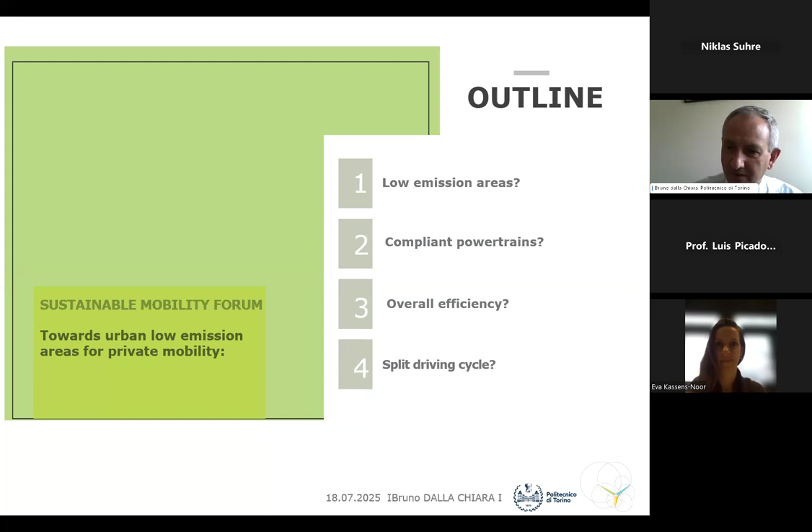As you remember, we already defined what a sustainable system is, a sustainable transport system. And the urban context, as you can see at the end of this slide, is important because there we have 3 citizens out of 4 living in Europe in this context. So 3 out of 4 people in Europe live in cities. This means that in the cities...

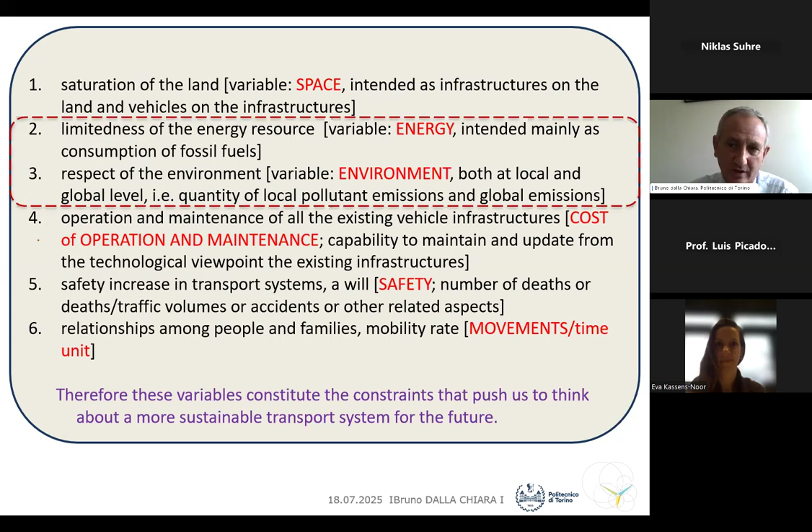European citizens express mainly their daily mobility there, especially for 4, 5, 6 days per week. Sometimes they go away during the weekend or travel for work, but there they express their daily mobility. Sorry if I underline this well-known thing, but it's important because when we discuss which could be the compliant powertrains, this is relevant. And then, as you may remember, these are the variables that influence sustainability. It could be an interpretation, of course, but I will concentrate on two of them: energy and environment.

Let's start with this slide, which represents, based on data published in February this year, the concentration of PM2.5. It's not the only element contributing to local pollution—we also have NOx and PM10—but I took this one because in the area where I live, in the north of Italy, we have one of the most extended areas where the concentration of particulate matter 2.5 is highest, as you can see here. But there are also areas in Europe with a certain concentration, and this is just one of the components of local pollution.

What I underline is that in Europe we are trying to solve these concentrations as far as possible. This is related to Directive 2881 of 2024, which I already mentioned in a previous seminar and will recall shortly. The message I'm providing is that there are areas in Europe where the concentration of particulate matter or other local pollutants is more or less high, and we try to solve them.

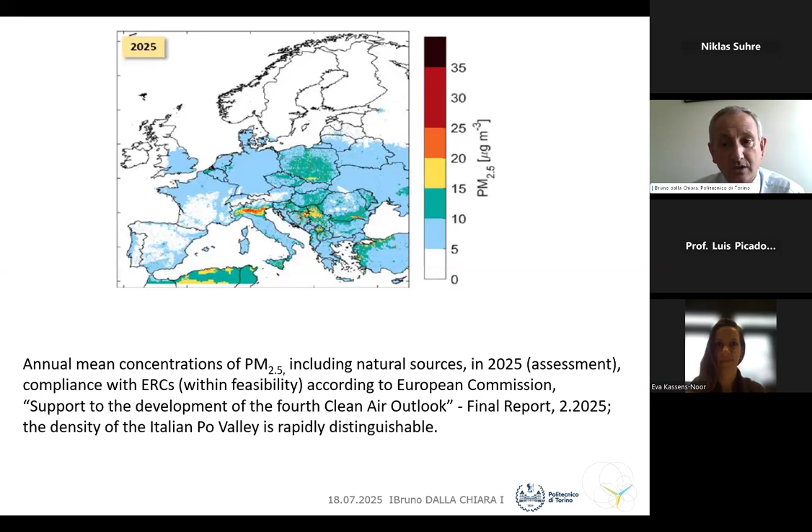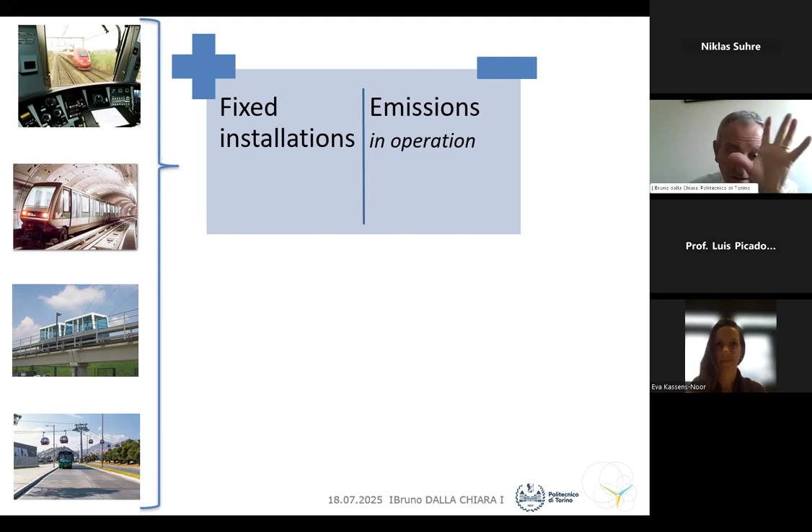Then, as you may remember, more fixed installations in the urban context mean less emissions in operations. This is obvious, because typically we can rely on electrified lines. So we differentiate at the well-to-tank side the energy sources, and locally we typically use an electric motor. This is positive because we also concentrate the masses that have to be transported—addressing trains, metros, automated people movers, and cableways. But I will not speak about them; they almost all rely on electric traction and electric motors on board.

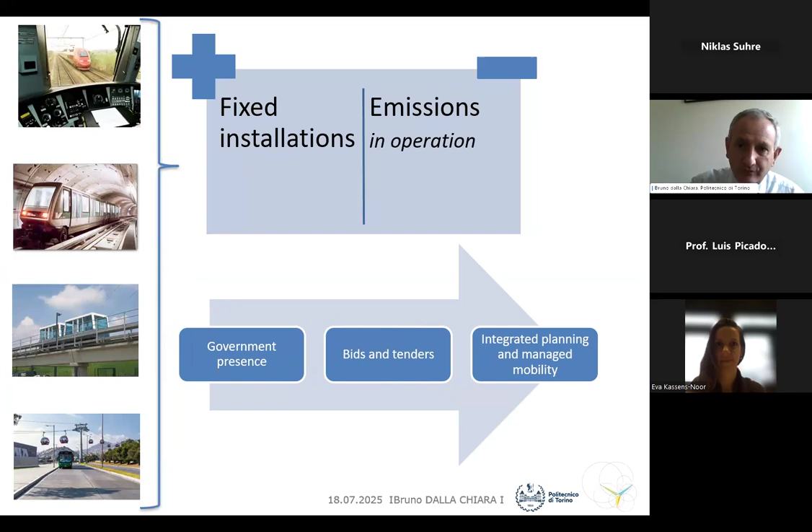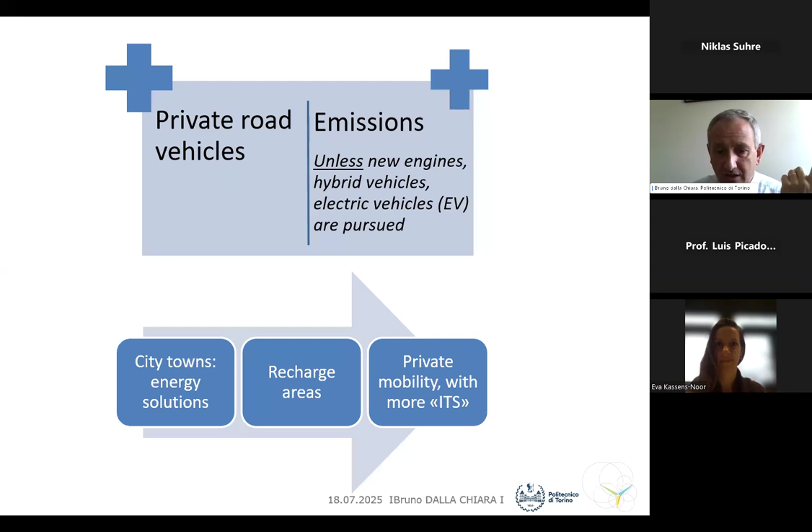We will concentrate on the distributed flows related to private mobility. As far as we have government presence, bids, tenders, and integrated planning, we can rely more on fixed installations, less typically on private mobility. So more private vehicles generally means more emissions, unless we address new engines, hybrid powertrains, electric vehicles—and we need to understand today which could be the most suitable ones.

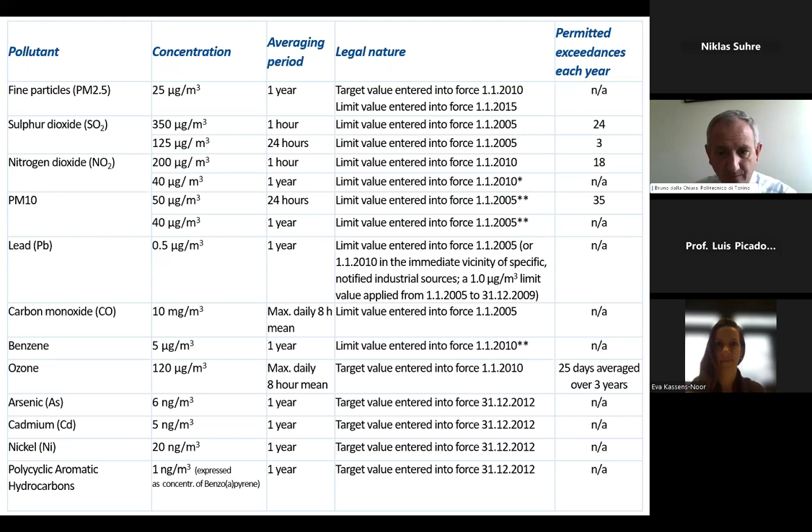I recall again the passage from Directive 50/2008 regarding the concentration of local pollutants, to which we associate this slide: the concentration, the period of reference, the permitted exceedances each year. This becomes, as I mentioned before and in a previous seminar, Directive 2024/2881.

This implies some reduced limits need to be respected, in order to guarantee normal use of the city. Otherwise, the public administration has to intervene. It's said that from next year they could even receive a fee, have to pay a certain amount of money if they don't respect that. I'm not sure about that, it regards political aspects, but it's said like that.

You will also remember, you can remember the passage, so I recall the elements concerning local pollutants. As regards global emissions, the CO2, the passage from 130 and nowadays 95 grams of CO2 per kilometer has been actuated in 2021, and the European Parliament in 2023 has declared the aim to reduce these 95 grams of CO2 to zero in 2035.

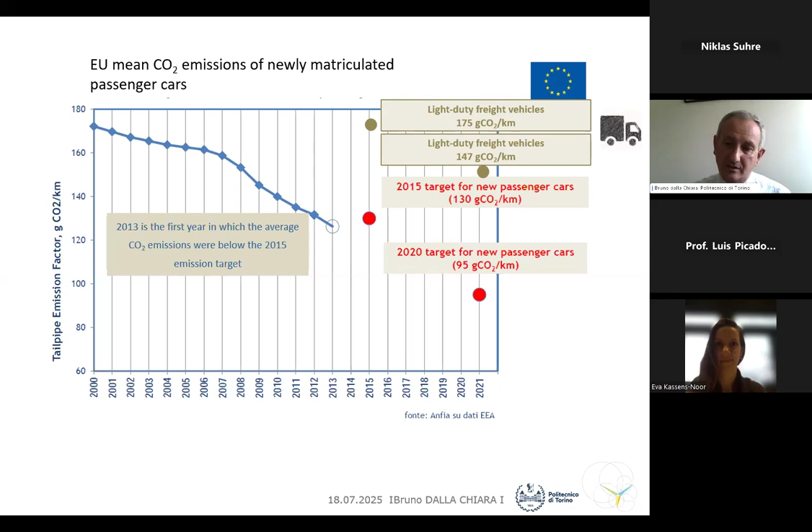This is happening in other parts of the world, as I already said, so we are not alone as Europeans, but we are alone when we want to say we want to reach zero in 2035. Zero where? Because electric vehicles have no local emissions, but they have emissions for producing the energy and storing the energy in the battery. We need to find a solution.

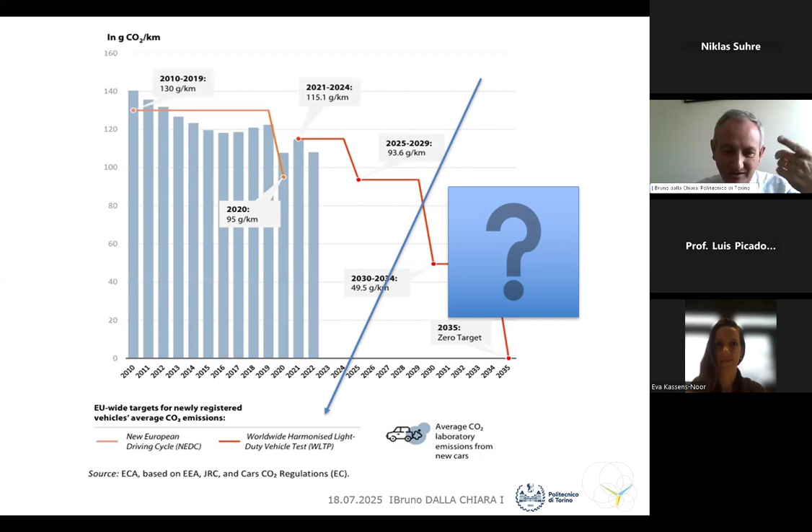How? Let's remember that we are referring to the WLTP, the worldwide harmonized light-duty vehicle test procedure, a conventional cycle harmonized in the world. Nobody actually does that, but conventionally everybody has to respect it. And as you already know, if we deal with electric vehicles, we don't have the tailpipe, so as I said before, we need to consider the energy chain.

The problem is, as I anticipated, the battery, because the battery has a low density with respect to alternative fuels that we have at disposal, and needs time. If we want to reduce this time, we need power. And if we want high power, we need to pay, and we need the electric grid suitable for providing that. Last but not least, we need to guarantee that on the territory.

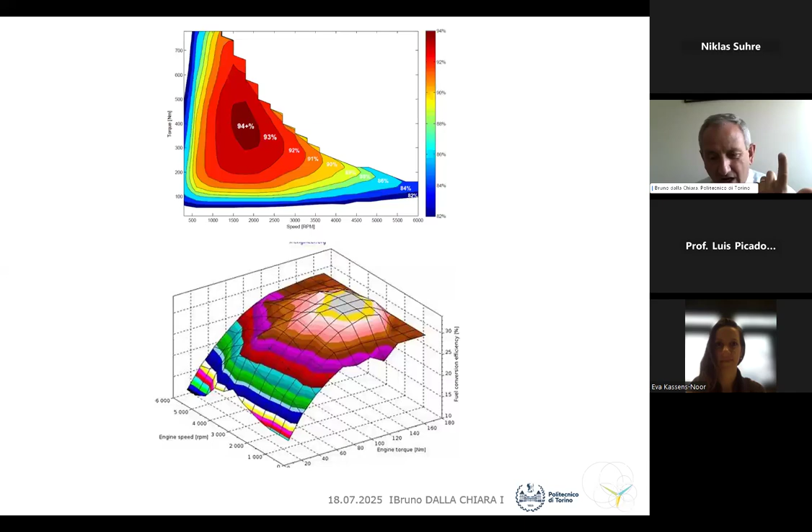Since we need to arrive where there is the electric grid, if we rely on electric power, we need to guarantee an electric grid. But on the other side, if we have a liquid fuel, we can bring the liquid fuel to the vehicle. So each of the two solutions have some positive elements and some negative ones. So in order to arrive at the best powertrains for urban mobility, we need to know the physics of the problem, and here we are.

Now I start something brand new with respect to what I said in the last two lessons, and we analyze the well-to-wheel from the efficiency point of view.

Let's suppose that we want an electric vehicle. I say, well, I don't contribute to local pollutants—PM 2.5 that I mentioned before, PM 10, NOx—I'm not contributing. So I like that. But at the same time, let's remember that we want to contain the global emissions, so CO2. To do that, we need to look at the overall energy chain.

And in this case, we rely, for example, on a thermoelectric power plant installation, which has a certain efficiency.

The most expected alternative is renewables, of course. But renewables mean having solar power, windmills, hydroelectric available for a great quantity of energy. Let's remember from my first seminar that transport systems absorb in Europe nearly one third of the overall energy production. So if we want to provide an alternative with renewables, it's a huge amount of energy that we need.

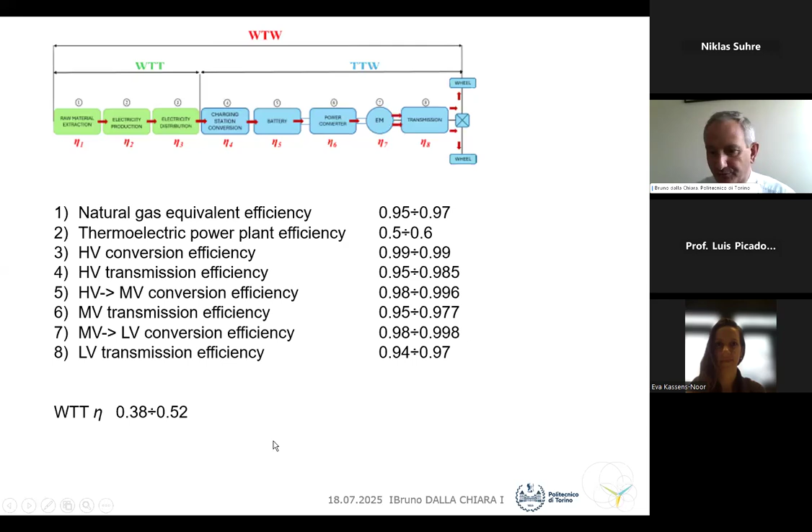Then we want to use this power for recharging electric vehicles, but the CO2 emissions have already been generated in this phase, especially in the power plant. Then let's consider the tank-to-wheel, and we are referring again to a battery electric vehicle.

We have a charger efficiency, in the charging station, that can lose some percent - minimum 3% is already too low, could be 3%, 4%, even 10-12%. Then we have the round-trip battery efficiency, which depends on the battery itself. I cannot enter into too much detail, but we lose 10-15%. Then if we have the aging effect, this loss of efficiency while charging the battery can increase.

Then we have the inverter efficiency on board, 0.95 more or less, and the efficiency of the electric motor that corresponds to the map I mentioned before - it depends how it works, 0.85, 0.90, 0.92, something like that. And then we have the transmission efficiency on board.

We lose some points there. I've not inserted this because it's very variable depending on climate conditions, on the conditions on board that the driver wants, and the BMS - the battery management thermal system - which implies, as we will see shortly, a certain variation in the overall efficiency.

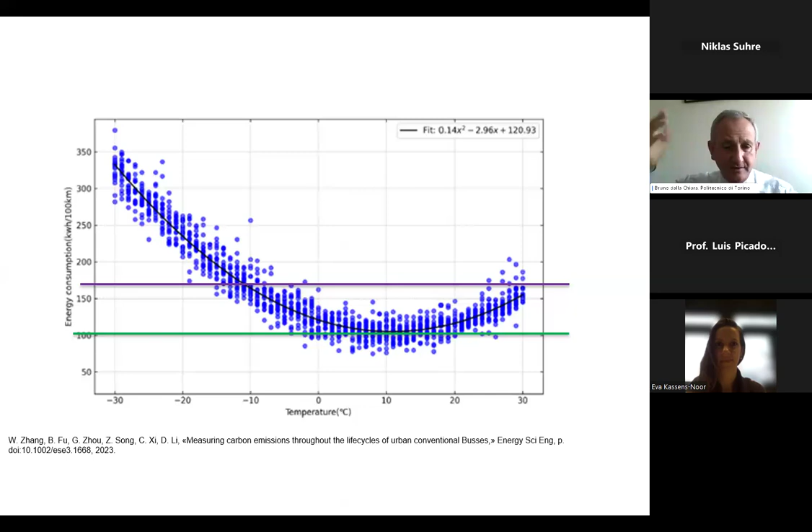But if we look at CO2 and at the well-to-wheel, just taking as input data the efficiencies which provoke a certain consumption or loss of energy, then we understand that it's difficult for the electric vehicle to be winning in energy in any condition, from the energy point of view, without considering the thermal effect. An internal combustion engine has an efficiency, as we have seen, starting from 48%, but in the city it can be reduced below 20%.

So in that case, the overall energy chain is in favor of electric traction. While if the internal combustion engine can work well—meaning not frequent acceleration and deceleration phases, not traffic jams, not searching for parking, not traffic lights—then the overall energy chain is in favor of the internal combustion engine. You can have that condition also in serial hybrid powertrains, because the internal combustion engine operates in the highest part of the map. We will see that shortly.

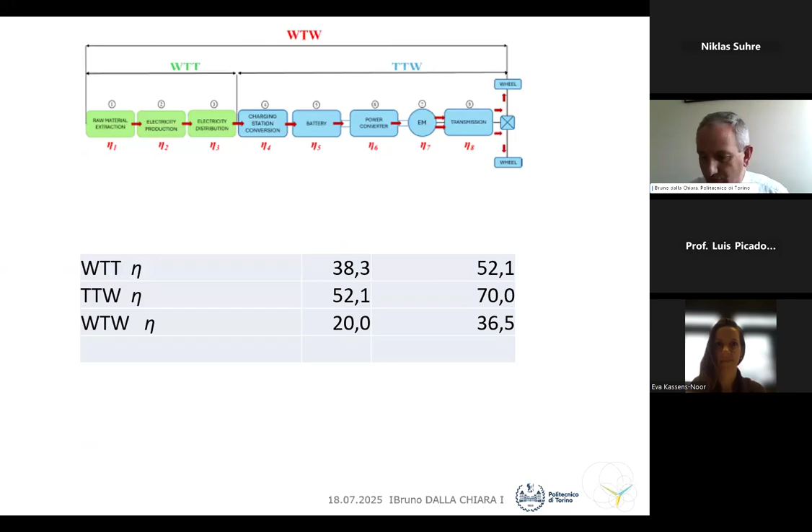So once we understand the overall efficiency, we can calculate it for each case. I just gave you a very wide example, but you can calculate it for each condition. We need to consider the usage that users of automobiles make of their vehicles. Here you have a typical distribution from different sources—there is a comparison in the publication I mentioned, which is a parabola.

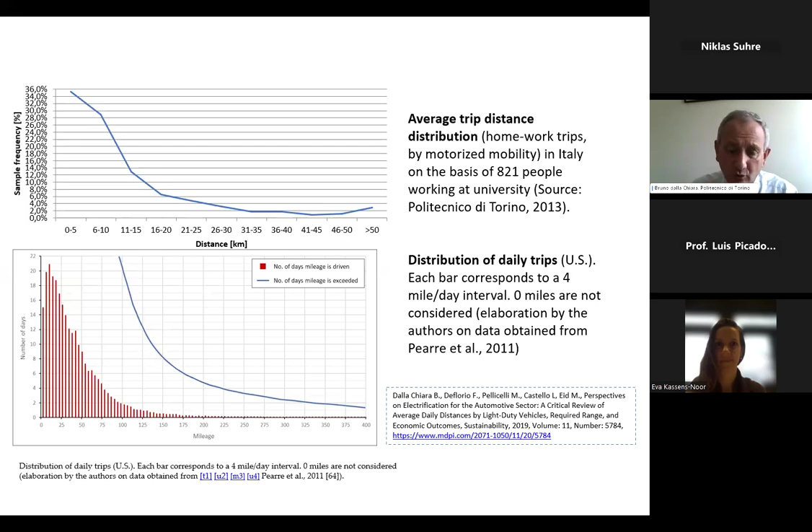As I mentioned in previous seminars, on the left part of this picture we have the lowest efficiency of the internal combustion engine, but also the most frequent and short travels of a typical European citizen. While where we have longer distances, and where it is more difficult to provide electric power, typically we have the highest efficiency of the internal combustion engine and longer travels which are less compliant with the autonomy of electric batteries.

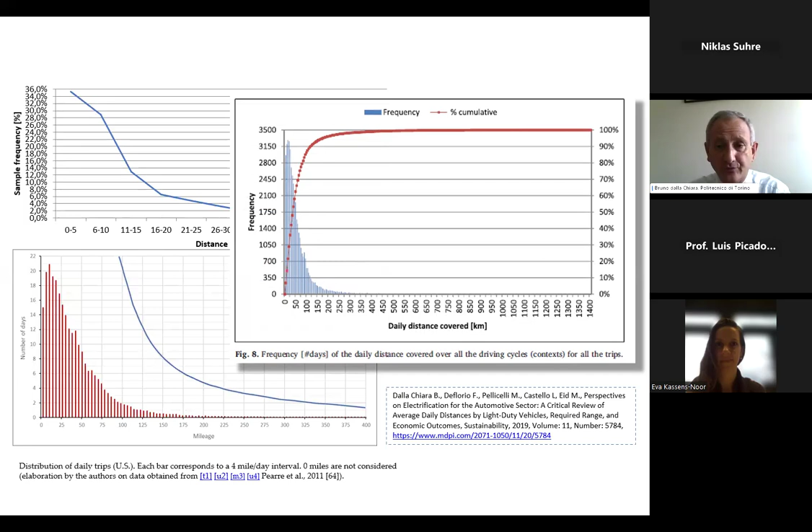So this means we have to look also at the relationship between frequency and daily distance covered, in order to couple that with the energy consumption of the vehicles and the idle time we have at disposal. But the first main message I want to leave today is that we can split urban context from extra-urban context. Where is the limit?

Geofencing. A city can decide that just the central historic part is the one to be protected from an environmental and traffic point of view—the use of space, the use of air—or it can decide that the overall surface of the city has to be protected. It's up to the administration, up to the condition.

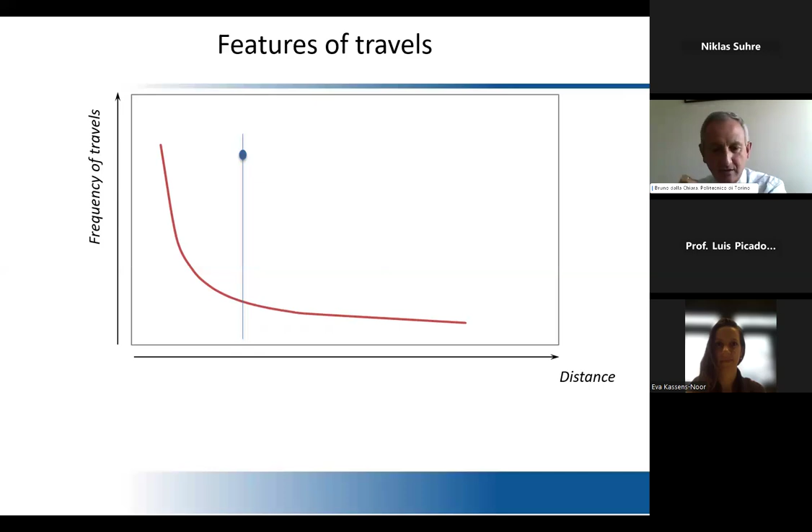You remember that picture where we had the concentration of PM 2.5? Some cities could decide that the overall city has to be considered, so it depends on the local administration. But what I'm saying is that we can split local problems from extra-local or extra-urban problems. And urban mobility, since it's frequent and with short distances, can be more compliant with the need to have electric traction.

So the decision of the European Parliament can be applied in an urban context, though from the well-to-wheel and life cycle point of view—well, from the well-to-wheel—it is not so compliant with an extra-urban context.

If we look at the life cycle, what is separated is the production. Production of a vehicle in China, for example, where we have 63% carbon, is something that has to be avoided from the point of view of CO2. From the point of view of well-to-wheel, electric traction in the city could be a good solution.

But if we look at the overall picture, what I can tell you—and this is a second important message—is that it's not good to have this clash, this competition, between the electric motor and the internal combustion engine. It's much better, and I said that in Darmstadt already, it's much better to have their collaboration.

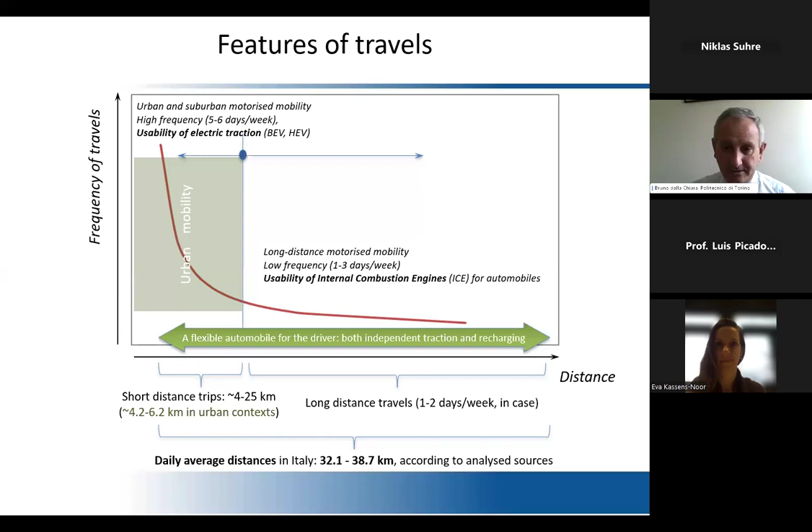Let's recall which are the alternatives, so now I can point out which can be the most relevant, suitable, and attractive ones.

Micro mild hybrids are a good bridge towards full hybrid. They are the entrance level. They already obtain something, and their benefit is much higher exactly where we need it, that is in the cities, during acceleration and deceleration phases.

But if we want to be serious, we have to look at full hybrid. In the full hybrid, we have the possibility to make the internal combustion engine work at its highest efficiency, or to put it in parallel or in series with the electric motor. These are the two alternatives: parallel or serial.

Within this context, we can have the plug-in option, to recharge the battery both from the internal combustion engine and directly from the grid. This, in the urban context, is much easier than in the countryside or on the mountains, because you cannot have a grid spread all over the territory - that would be exaggerated, to be honest. The electric grid in the urban context is something we can pursue.

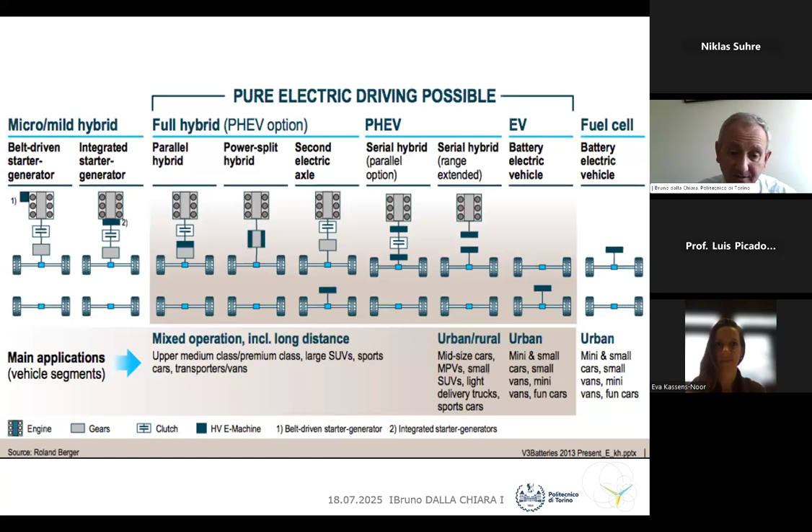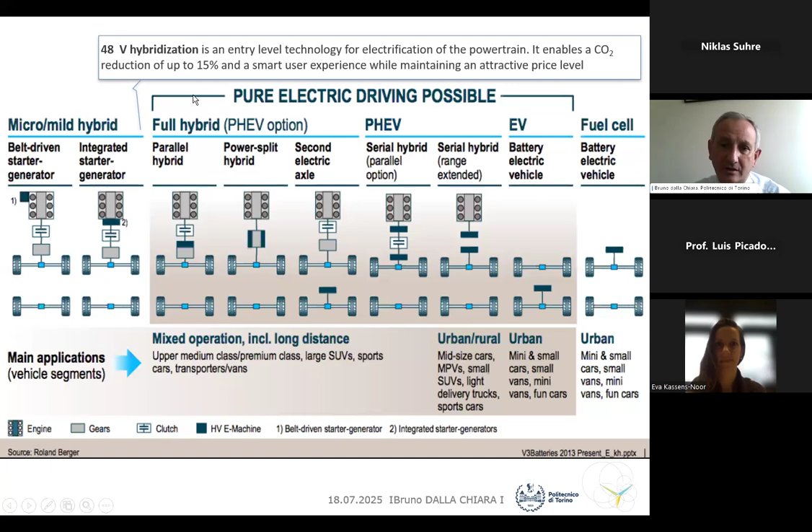Given that, there is also the 48-volt hybridization, which has become much more promising in the last two years and for the next ones, as a sort of micro-mild hybrid that is a bit more similar to a full hybrid. It's a promising alternative. Let's repeat this aspect in order to arrive later at the resume and conclusions.

The architecture of a series hybrid electric vehicle implies that the internal combustion engine works independently from the use made of the wheels. That means it works at the highest level. This is already a great gain, because we don't work at 18-20 percent efficiency, we work at 30, 40, 45, up to 48 percent, which is the top of efficiency.

So it's difficult to win against that in the overall energy chain in a general context. It's easier in specific contexts, but if it works by itself in that area of the map, it works well. Then you use the electric motor to vary the speed of the wheels through mechanical transmission, so the power is stored in the battery, but the internal combustion engine produces that for the battery, and then through the inverter it's provided to the electric motor.

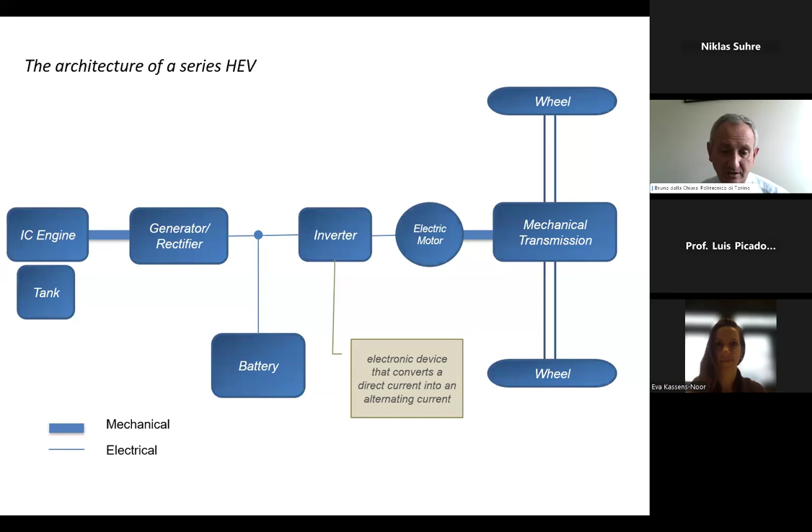Consider that the internal combustion engine has some new possibilities. I cannot reveal them yet because they are under development, which allow it to work by itself at very, very high efficiency, even more than those I mentioned before.

This is a possibility for the future, provided that, differently from the vehicles nowadays available, the battery has sufficient power to guarantee mobility in any city. The vehicle has to move - it arrives in a city where there's just a small protected zone, or another where the whole city is covered, so you need to guarantee some tens of kilometers. Typically nowadays, the full hybrid, not plug-in, does not guarantee that - they just guarantee a few kilometers, except for a few models of cars.

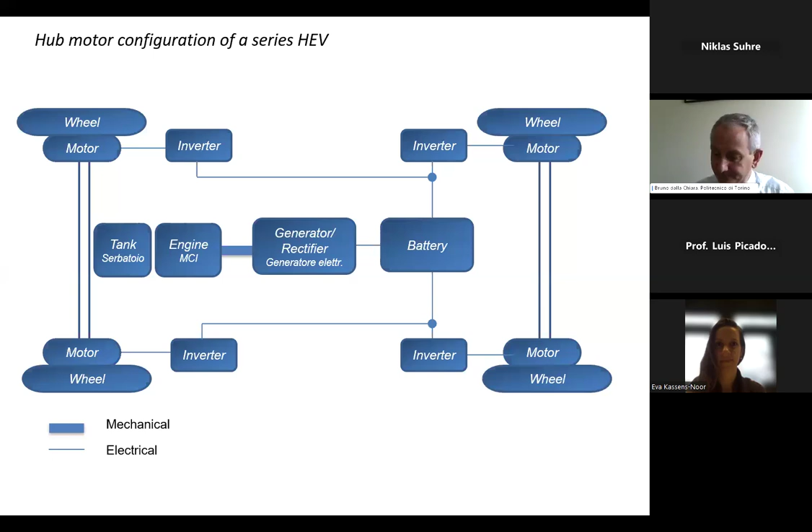So in order to address the goal of moving by electric traction in the city, we need a battery of 10, 15, 20 kilowatt hours, which guarantees 50 to 100 kilometers by electric traction. But still, you have an internal combustion engine for moving everywhere and anywhere.

In the parallel configuration, you have the possibility of downsizing the internal combustion engine because it's assisted by the electric motor. This allows reducing the mass a bit, reducing the consumption of the internal combustion engine, and reducing the tank too.

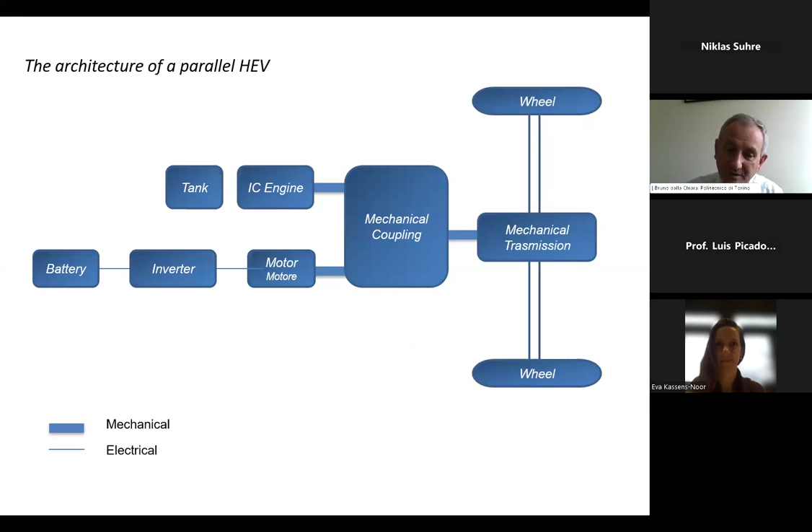This way you can guarantee battery, inverter, motor with a mechanical coupling of the motion of the vehicle, but also through the internal combustion engine. The battery should actually assist the electric motor and the internal combustion engine, otherwise the internal combustion engine will work more and part of the benefits of hybridization will be lost. So it depends on the actual use made of the vehicle. You have to be a bit educated to drive that vehicle. Then you have a series-parallel hybrid electric powertrain.

I won't go into many details, but it's a mixture of the previous two, and there's the plug-in hybrid. We already mentioned it, but now let's look at it differently: in this context it's clear that we can move in the city with electric traction, with a battery of 10, 15, maximum 20 kilowatt hours, without contributing to local pollutants. At the same time we have a very efficient distribution of power, and we don't have to rely on the well-to-tank chain I mentioned before for electric traction, because we obtain the combustible directly on board. So it's a good alternative.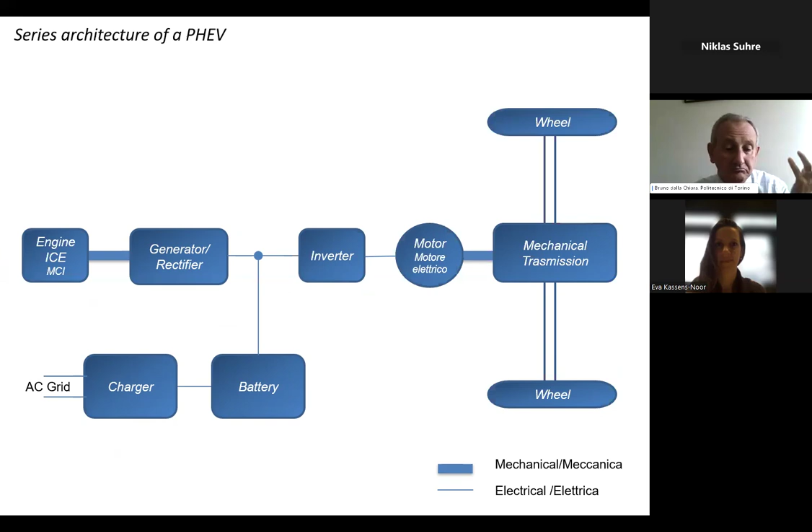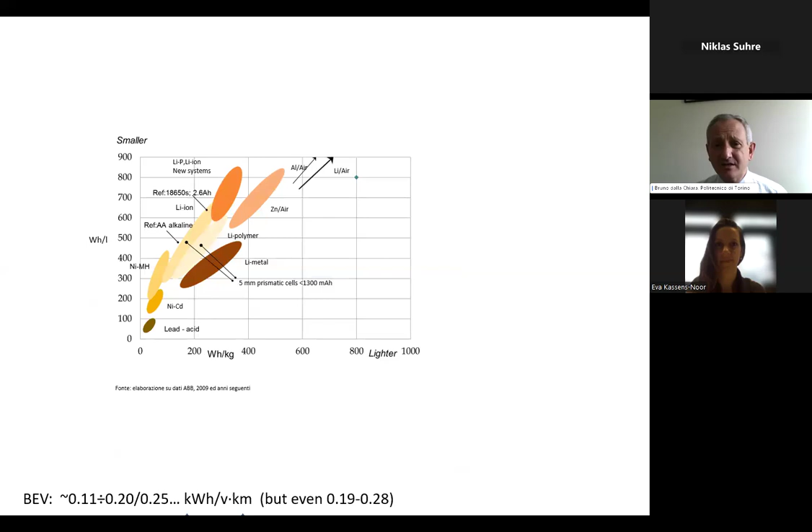Let's remember that if we increase the dimension of the battery, we increase the mass, and this is not so good, especially in acceleration phases. The perspective for next year and even the next 4 or 5 years is to stay at these levels—that is, 30 to 60 times less than the energy density of an oil-derived fuel, which is something like 11.7 kilowatt hours per kilogram. So you can compare these two values and understand easily that it's not convenient to bring energy in a battery.

It's convenient if the battery just has to solve the problem of local pollutants. Otherwise, if it has to solve all the problems, the battery has to bring too much energy, and it's not competitive anymore—an increase of mass, an increase of time, and if you want to contain the time, an increase of money. And if you have damage to that vehicle, you have to change that battery, and it costs even more than half the cost of a vehicle.

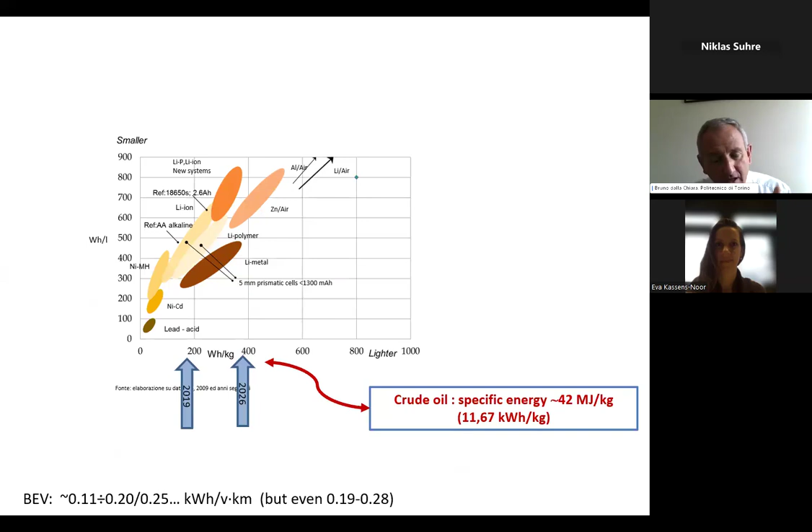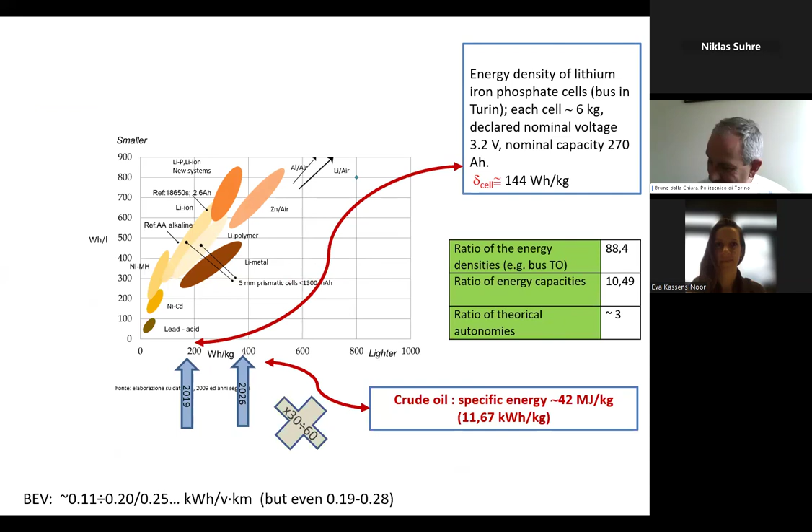I would have some doubts about being pushed to rely just on electric vehicles. Anyway, I've tried to underline the benefits of electric traction, the limits of the battery, and the benefits of the internal combustion engine if used in a certain way. Sorry if I simplify a bit, but with the goal of containing time, this is important.

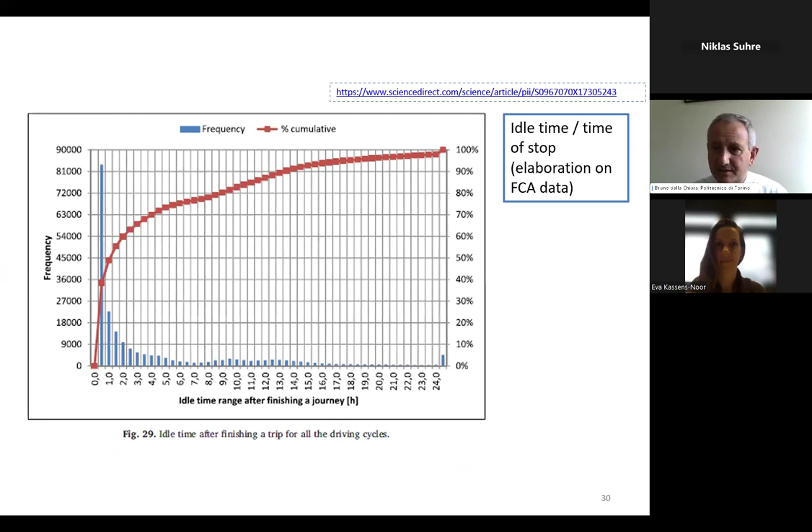When I mentioned the typical use of the car before, I mentioned idle time. Here is a distribution of idle time across a wide number of vehicle examples from which we collected data. What's clear is that typically we should recharge when we have time, not be stressed about leaving a parking area, especially in the city where there are frequent changes in parking area use. It's better to have a private parking spot, and not everybody has this, but suppose a certain percentage of people do, either at home or where they work—then it's much better to use the available time for recharging, and better to have low power since it costs less and can be compliant with batteries that are not so big.

We could say, well, I increase the power so I don't have the problem of recharging time, but you increase the payment, and anyway you increase the aging effect for most or some of the batteries. Given that, let's go back to the maps.

So we have the internal combustion engine on the right side, the electric motor on the left side. Let's make them collaborate. This way, when the electric motor operates without using the internal combustion engine in the city, we have no local pollutants, and it works much better than the internal combustion engine because it's not so influenced by traffic lights, traffic, queues, and so on. But we should not rely too much on batteries just for moving where there is a problem of concentration of pollutants—just in the city.

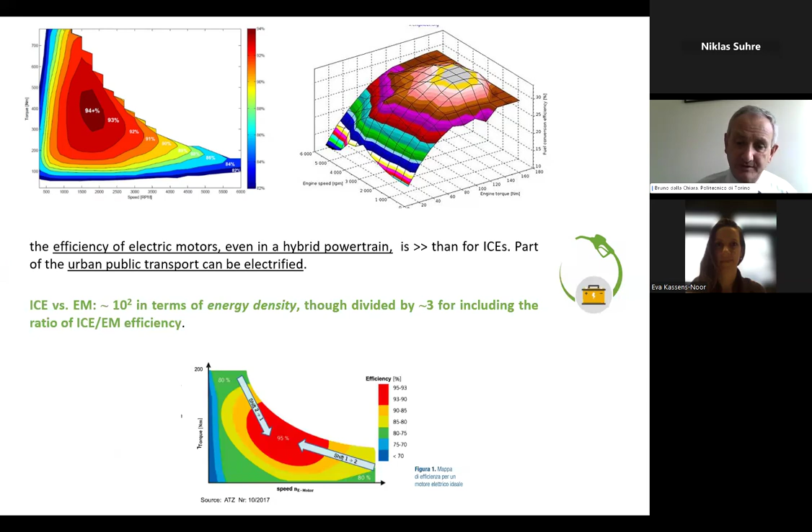It's better to leave the urban context to electric traction and leave the other areas—on the mountains, at the seaside, in the countryside, outside the cities, in little towns—to the internal combustion engine. This is a map of latest research engines with an efficiency of 47%. If you look back at the efficiency I mentioned before, it's quite difficult or impossible to win against an engine like that with an electric motor, considering the whole energy chain.

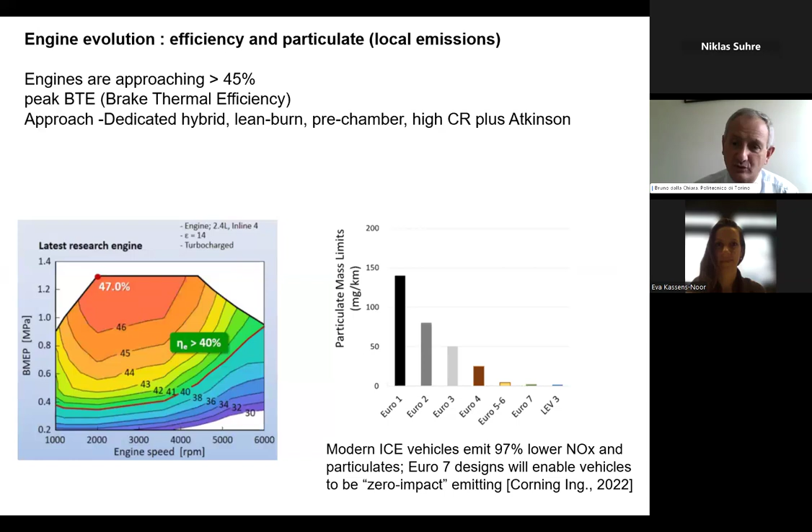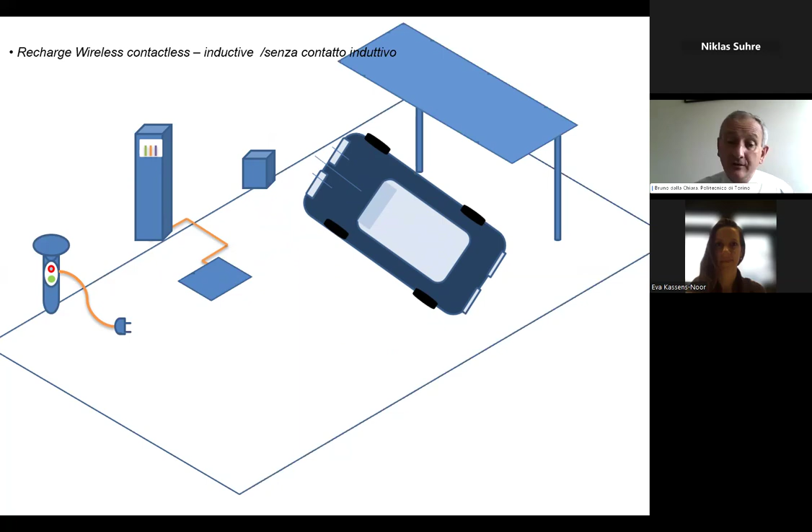But if we concentrate on energy and emissions, again, we need to address technological neutrality, keeping in mind the goal I mentioned before, considering the numbers. So we have different possibilities for recharging, as we already saw last time with the grid—plug-in, wireless, or with the trolley, as we've seen in Darmstadt with the lane from the airport of Frankfurt towards Darmstadt for heavy-duty vehicles or buses possibly. And then what shall we do with this?

Well, all of them could be good in this context, especially in the city. Outside the city it's a bit too exaggerated, too impacting on the environment and on the electric grid. So this means there is a number of possibilities if we concentrate on the city.

Also, battery swap could be a possibility, and there is a standard underway for motorcycles or rickshaws—I mean the little vehicles, where the mass is compliant with the force of one person. Okay, and this is the battery swap.

Given that, I have to arrive at the conclusions, so to leave some time for discussion. I've finished earlier this time because it's the third session and I want to leave more time, but today you are not so many, so maybe it's more difficult to have a discussion.

Anyway, the main conclusion is that considering what we have seen today, it's much better to split the urban context from the extra-urban one. Even the WLTP, the conventional cycle, is much influenced by the urban phases, because those 95 grams of CO2 per kilometer that nowadays we have to satisfy are much influenced by the urban motion, which increases the CO2 emissions.

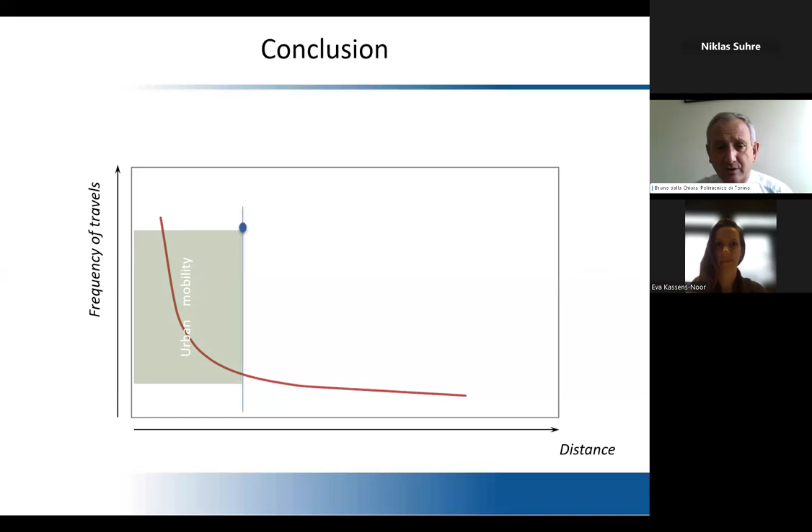In this context, we can split urban mobility, and it will be up to the politicians, to the local administration, to decide which part of the city has to be protected, and the usability of the internal combustion engine outside with this goal. Sorry, I have repeated some concepts, but I've arrived at the final steps of this sequence of three seminars. And urban geofencing—consider that Euro 7, in force from July this year, already contains a sentence mentioning geofencing. So we have the door open if we want to address, in that goal, the double goal of local pollutants and global emissions.